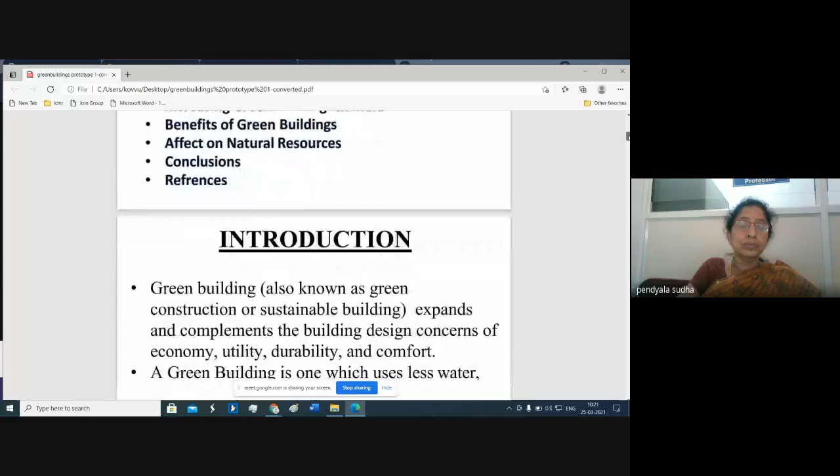So this is one of the examples of a green building. Now this green building expands and complements the building design concerns of economy, utility, durability, and comfort.

That means we use less water, we use less energy, we use solar. Less energy means energy efficiency - optimizing energy efficiency by using solar panels, so the building will be completely dependent on solar energy.

And it conserves natural resources - this is our third point. How does it conserve natural resources? Natural resources may include waste papers, slags, ash, and chopped wood. All these things we are using in construction, so this way it conserves all the natural resources occurring in the environment.

Then it generates less waste. Obviously if we are using natural resources, the waste we generate will be very less. And it provides healthier space for occupants as compared to conventional buildings - if we compare, pollution is very less, because here we are depending on natural resources only.

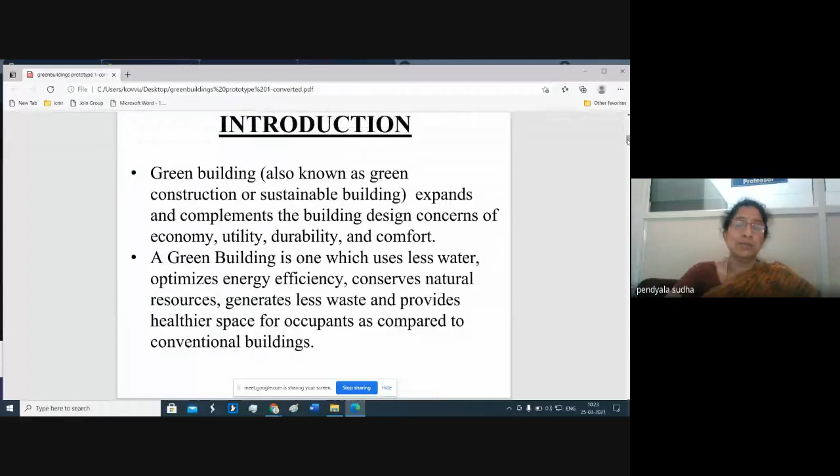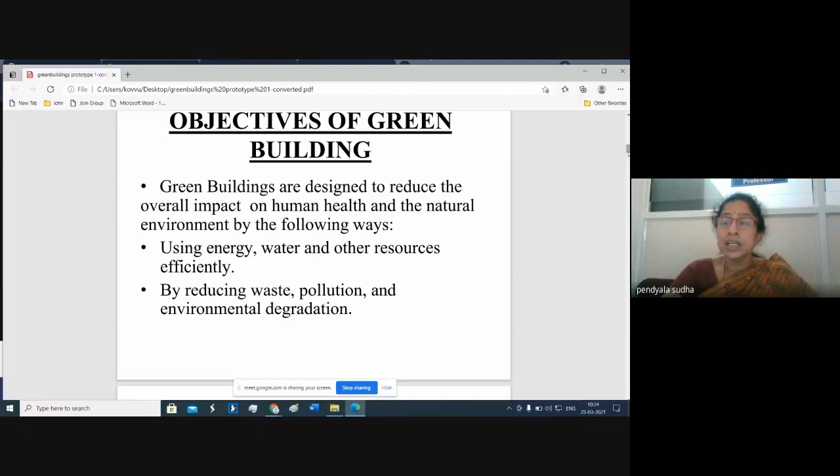Now, objectives. Green buildings are designed to reduce the impact on human health and the natural environment. We already discussed using energy, water and other resources efficiently, and by reducing waste, pollution and degradation - this is the new thing, environmental degradation. We are preventing environmental degradation.

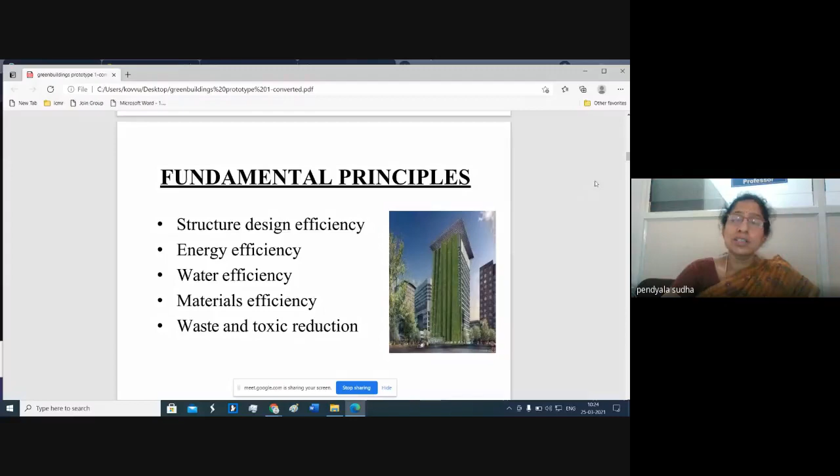So now, how is that efficiency achieved? You can just watch a building here - pillars are with walls, walls are with creepers. Now, it ensures 5 types of things: structural design efficiency, energy efficiency, water efficiency, material efficiency, and toxic reduction.

Now, what are the building materials used? We use slag from the steel mills and fly ash in concrete mixes. By using slag and fly ash, we are trying to reduce the carbon dioxide emissions, thereby reducing air pollution.

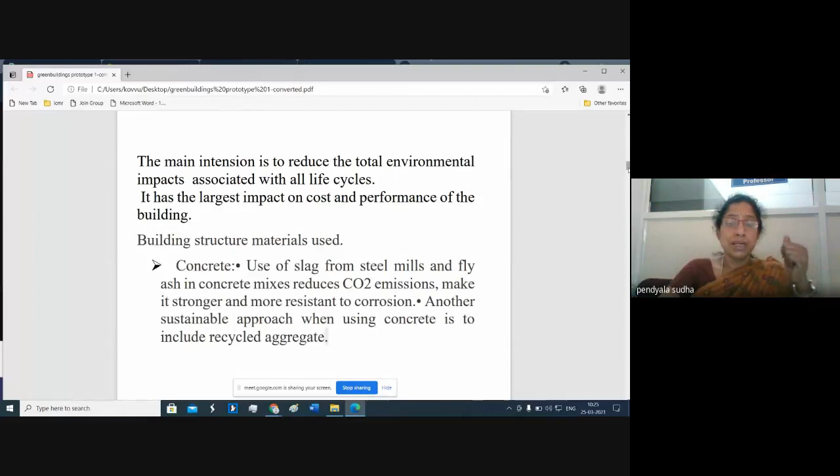And such type of building is also more strong and resistant to corrosion. Another advantage is that the sustainable approach when using concrete is to include recycled aggregate - the advantages when we use these two kinds of things are reduction of carbon dioxide emissions and more resistance to corrosion.

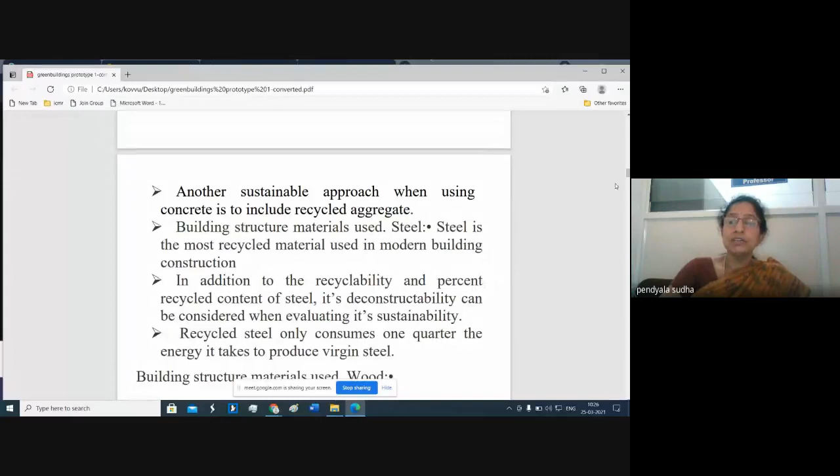Another sustainable approach while using concrete is to include recycled aggregate. Now, for building materials, we also use steel - in the modern world, the most recycled material used is steel. In addition to recyclability, the percentage of recycled content and deconstructability can be considered while evaluating its sustainability. Recycled steel consumes only 1/4 of the energy it takes to produce virgin steel.

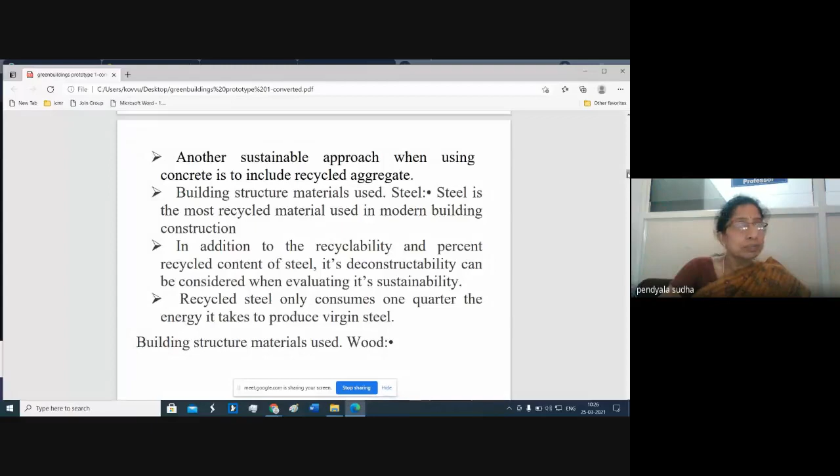Again, we are using wood. The sustainable areas of wood are efficient framing, alternative products, and sustainable material suppliers - these are the primary sustainable areas in the use of wood.

Even if you see, generally people go to gardens, people go here and there for such kind of environment - they require plants, they require trees. So for such an environment, we need not separately go to a garden, because that kind of bioclimate architecture we can have in the house itself. What we are doing is sending creepers to the walls - a creeper is a plant which creeps.

Or else, on the terrace, we can arrange a small garden - nowadays they are doing that. Even in restaurants, wherever you go, in restaurants and hotels in Hyderabad, you can see that on the terrace, a garden has been arranged.

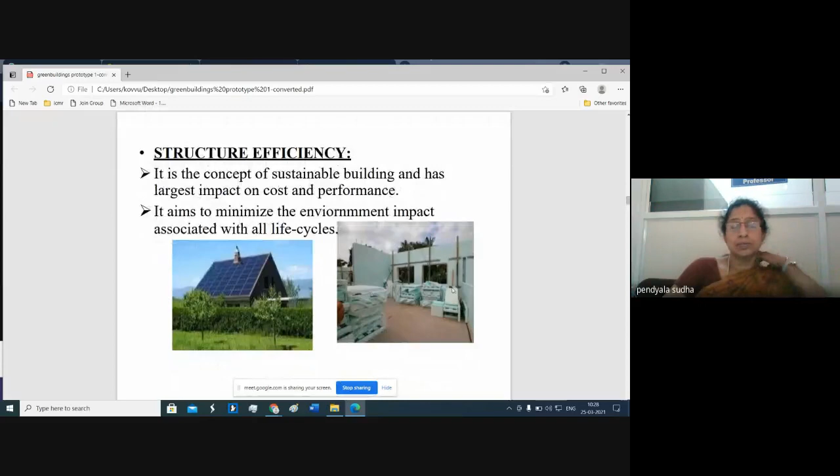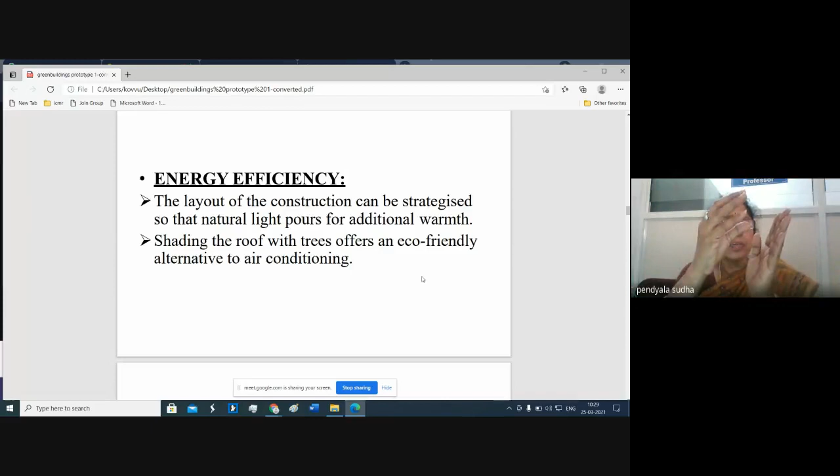Now, the layout of the construction can be strategized so that natural light pours in for additional warmth. In winter, when we want warmth, the strategy can also ensure additional light pours in. That means you can arrange a small pore-like structure through which sunlight directly pours and falls inside the house.

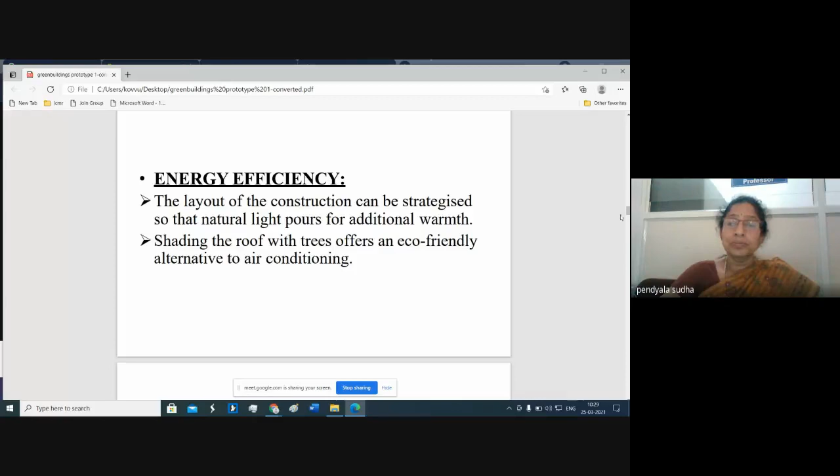Shading the roof with trees offers an eco-friendly alternative to air conditioning. As I told you, we can shade the roof with trees or a roof terrace garden. Upon the terrace and rooms, we can arrange trees, flower pots, and gardens.

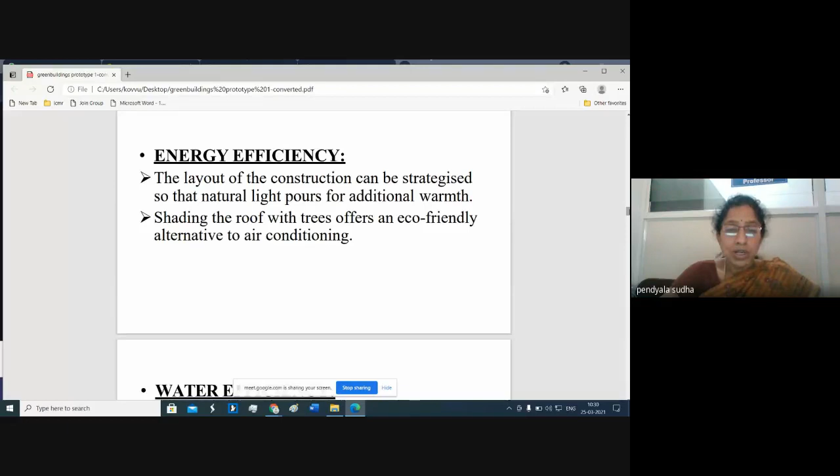Now, water efficiency - the second point. Here we are minimizing water consumption. How? Our aim is reuse and recycling of wastewater. So in every house, we set up a small wastewater recycling plant.

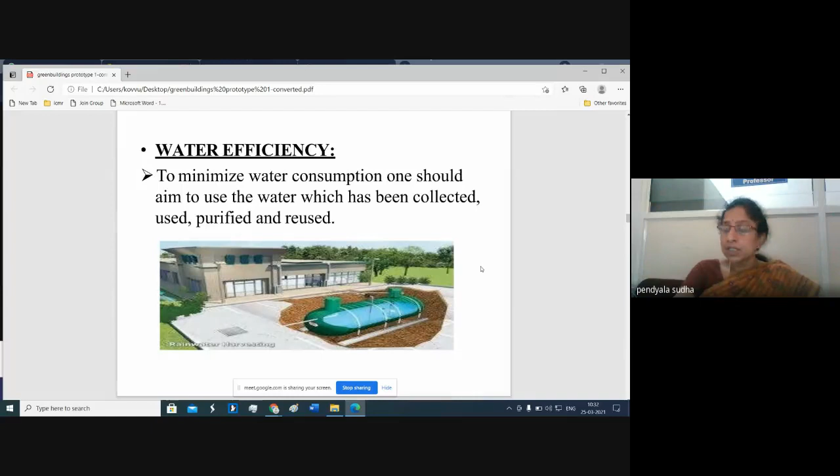Suppose at the backyard of the house, in a small place, a treatment plant is constructed - no need for primary, secondary, tertiary treatment units. Simply do filtration, construct water retaining pits or simple pits for removing sand, gravel, etc.

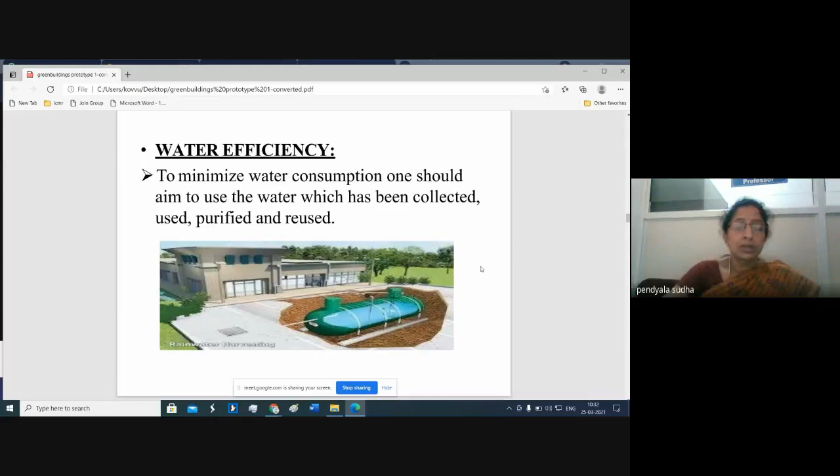Excuse me, just a minute, please.

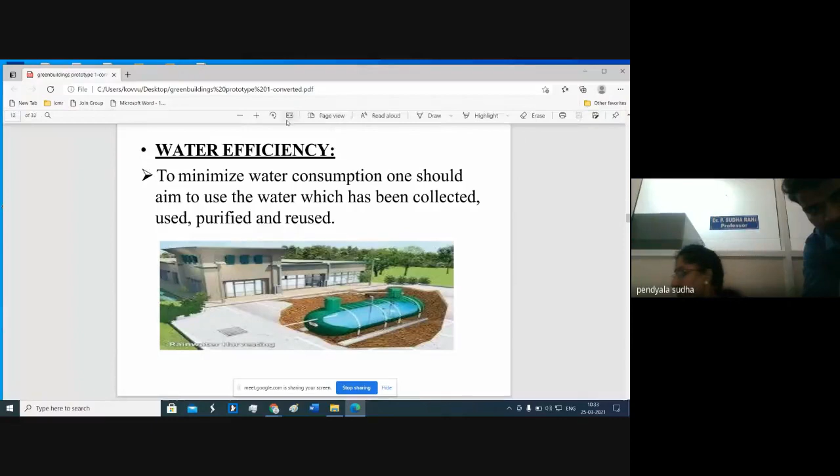Ma'am, should we leave now? Our next class is there, ma'am.

Madam, unmute your mic. Madam, your voice is not audible. Unmute your mic, madam.

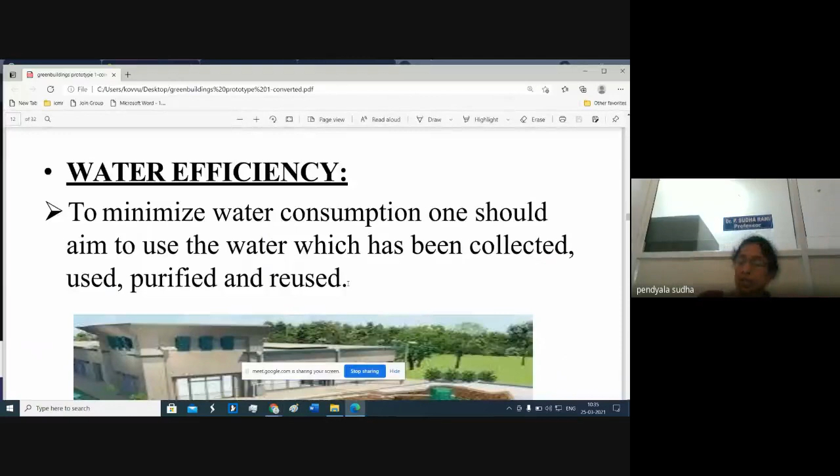Okay, fine. Let's continue. Now, what I was telling - are you able to see this, view the screen? Yes, ma'am. One by one, I will go through this.

So, water efficiency, we were speaking about. Lot of research is being done in this field. What I am trying to tell is that in the backyard, a small treatment plant is constructed which can remove oil and grease, which can remove suspended solids mostly, as well as color and odor.

These are the main things which interfere with water being reused. So if the water doesn't consist of suspended solids and total solids, etc., that water can be reused at least for gardening and other miscellaneous purposes.

So what we are trying to do is create a small treatment plant. In the treatment plant, we use screens and a scum remover, and we send oxygen so that the BOD, meaning the oxygen load, will be reduced. In this way we treat the wastewater.

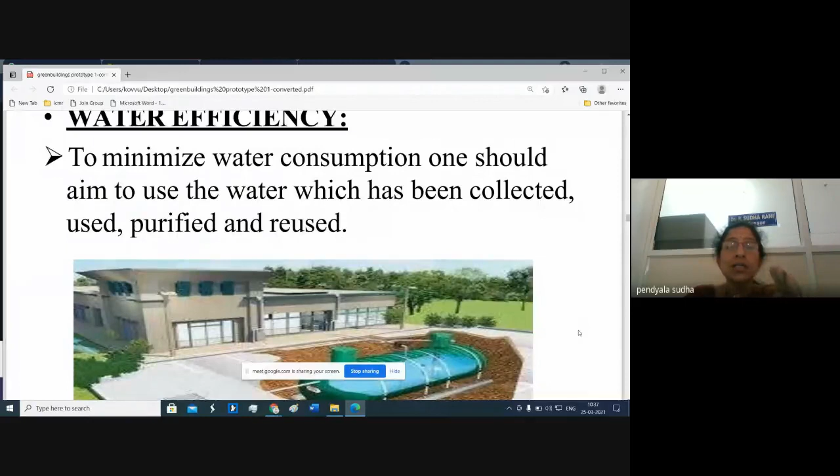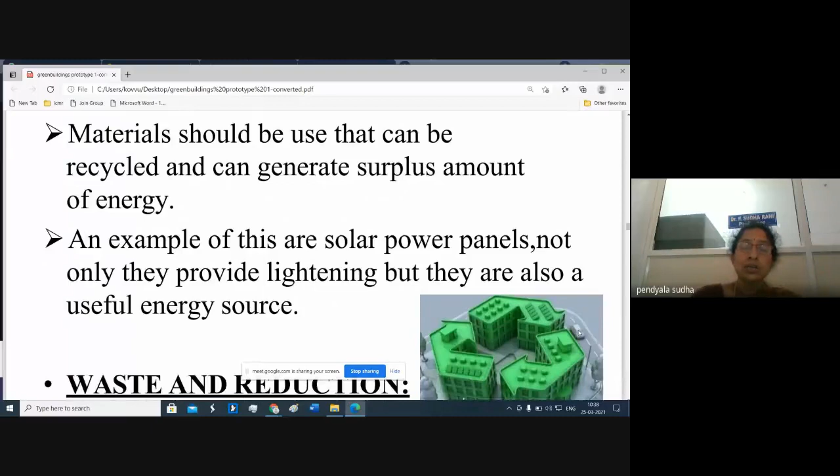Now the third thing is material efficiency. Nowadays in colleges and schools everywhere we are using solar energy, solar power. But in houses we have failed to do that. Most of the houses are not using solar energy.

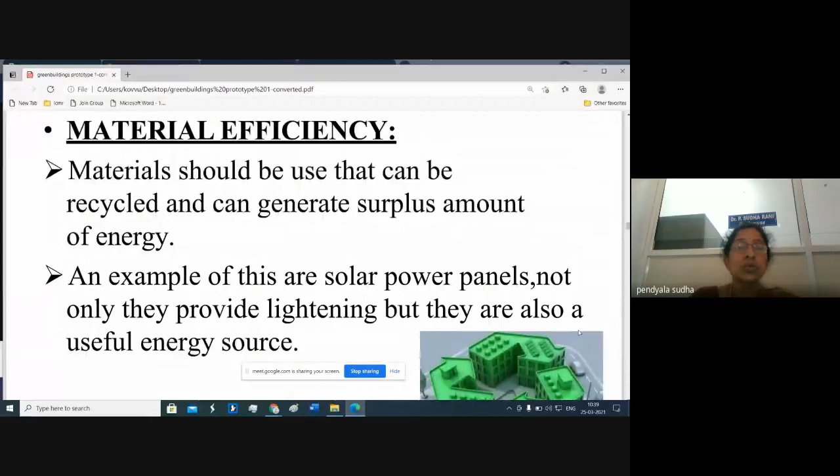Now you have to bring that concept also while constructing the house. Materials should be used such that they can be recycled. An example of this is solar power panels, which not only provide lighting but are also a source of energy. This needs to be brought into use for construction of houses and buildings, but they are not yet popular. Only 50% of houses use solar power panels, not 100%.

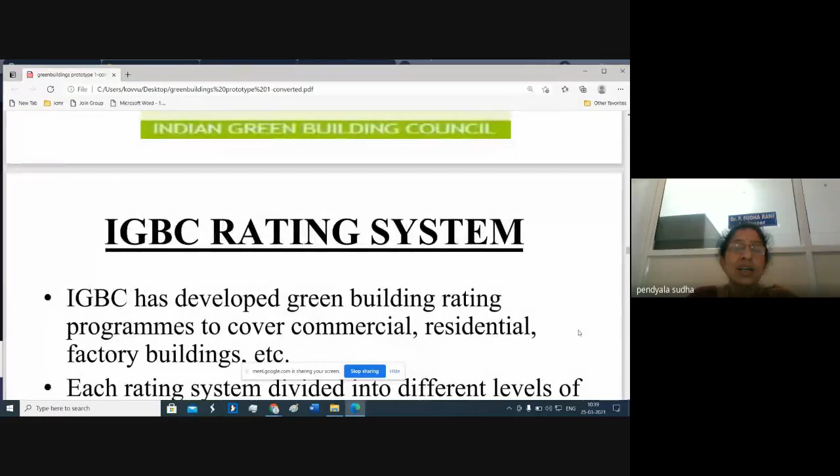The Indian Green Building Council, IGBC, was formed in 2001, and its aim was to bring the building movement in India and to become one of the global leaders by 2015 in green building. Still we are trying to do that. With this IGBC rating system, each rating is divided into 4 levels of certification: certified recognizes best practices, silver recognizes outstanding performance, gold means national excellence, and platinum means global leadership.

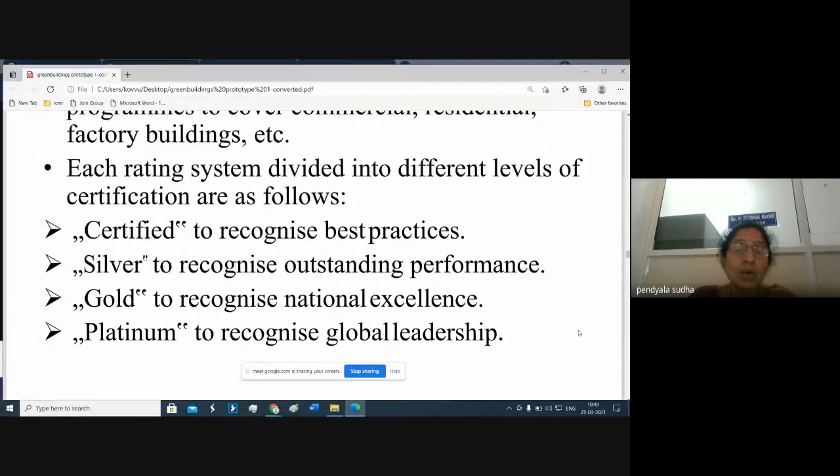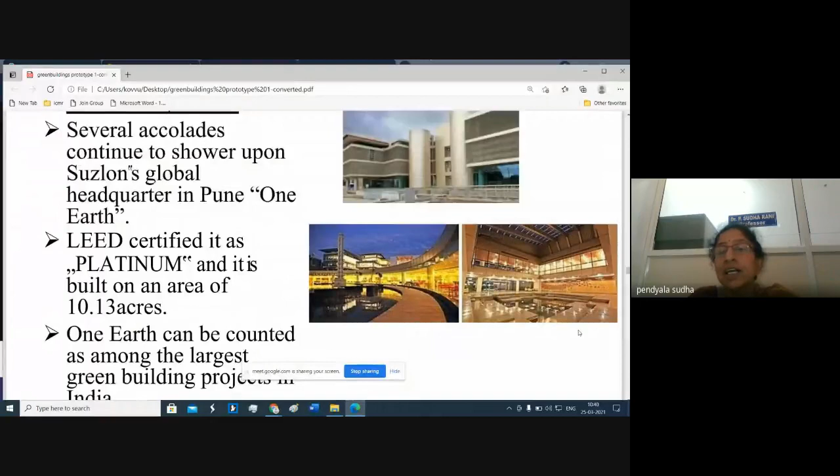This is platinum certified: Suzlon Energy Limited, Pune. LEED certified it as platinum, and it is built on an area of 10.13 acres. This building, One Earth, can be counted as among the largest green building projects in India.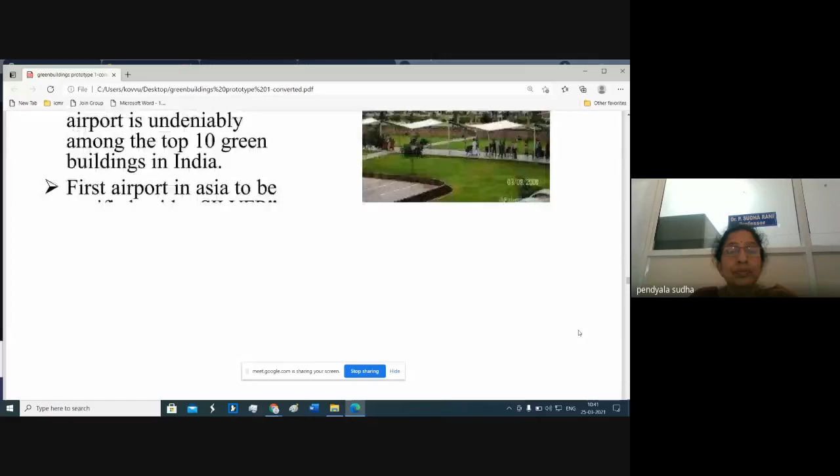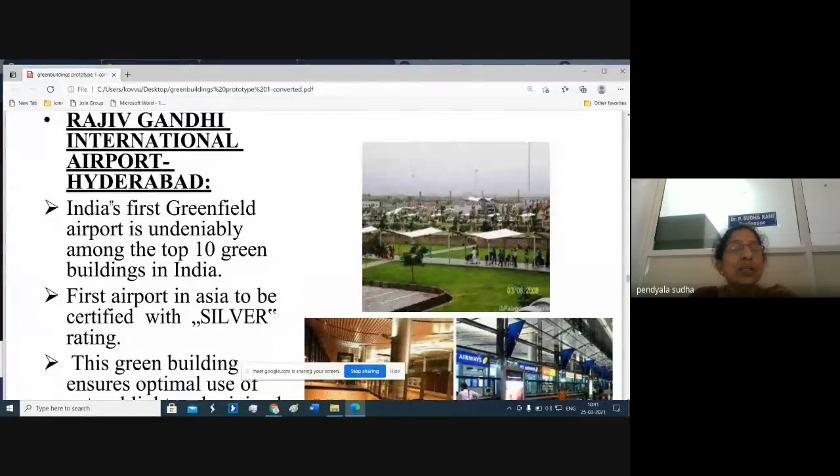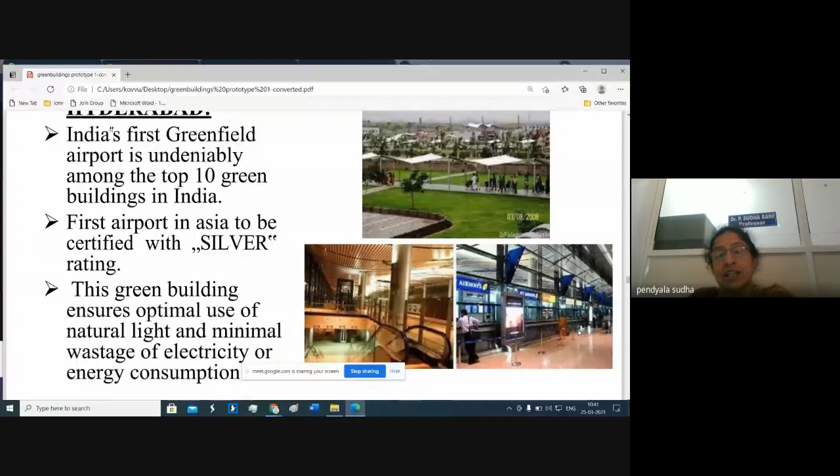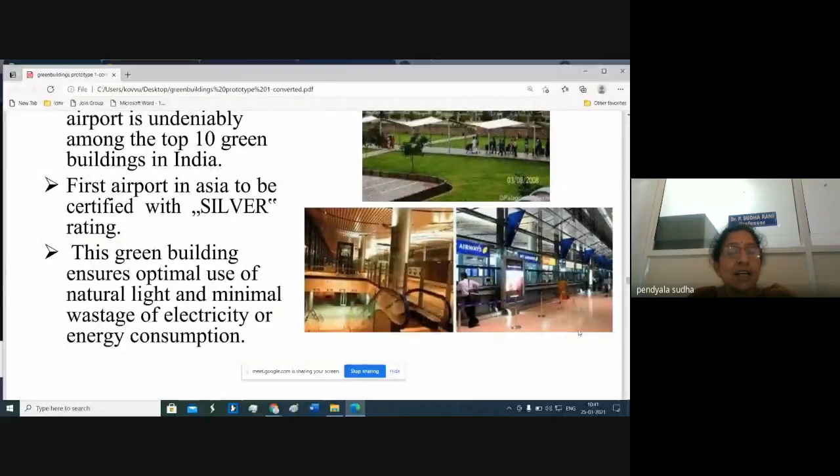Rajiv Gandhi International Airport, Hyderabad, India's first greenfield airport, is undeniably among the top 10 green buildings in India. It is the first airport in Asia to be certified with a silver rating. The green building ensures optimal use of natural light and minimal wastage of electricity and energy consumption.

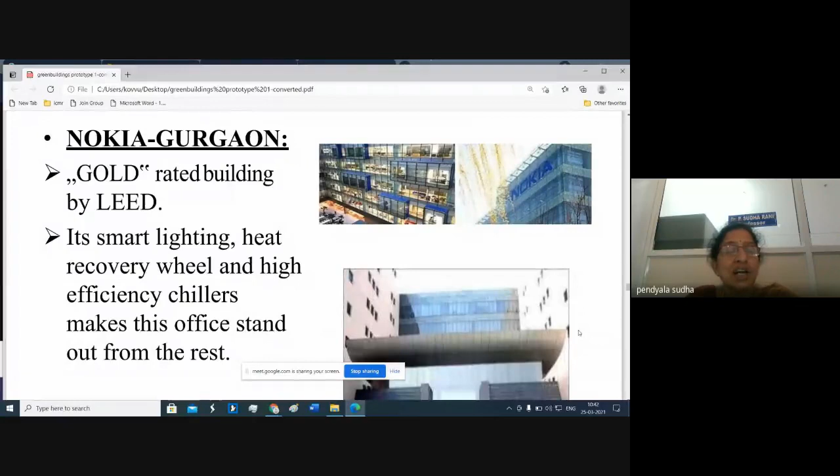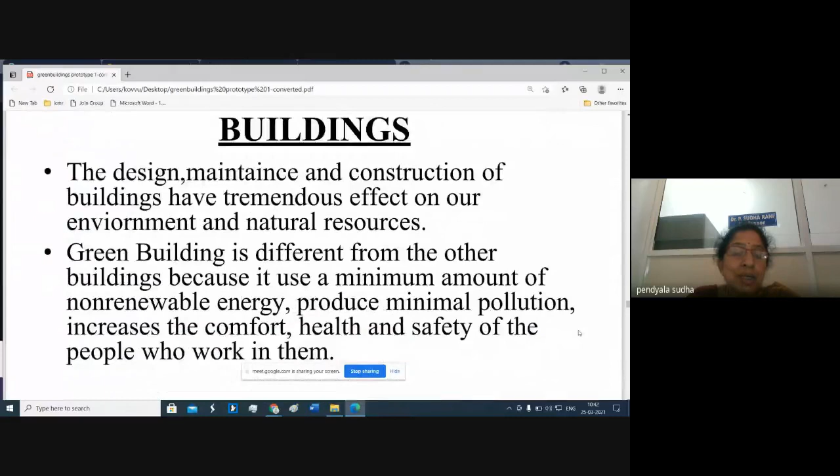Nokia Gurgaon is gold rated by LEED. It has smart lighting, a heat recovery wheel, and high efficiency chillers that make the office stand out from the rest. So these are some of the green buildings, completely different from other buildings. Today more than 1053 green buildings are being constructed all over India, of which 147 are certified and fully functional.

This is the status of green building in India. Now let us throw light on what materials are used. Let me show you.

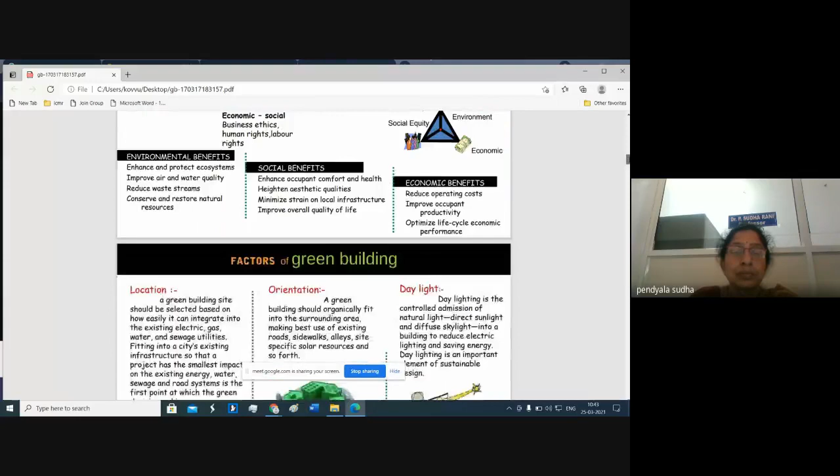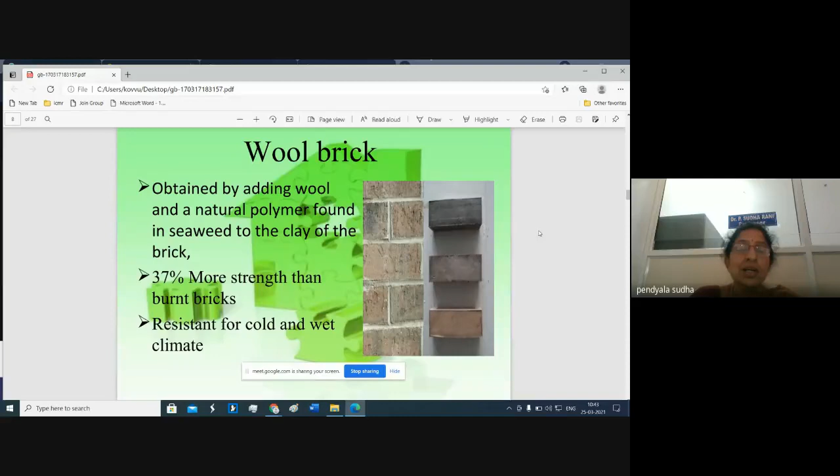Materials used: wool brick. These are some of the materials. Wool brick is obtained from wool added to the clay of the brick. The wool brick generally ensures 37% more strength than normal burnt bricks, and it is also resistant to cold and wet climate.

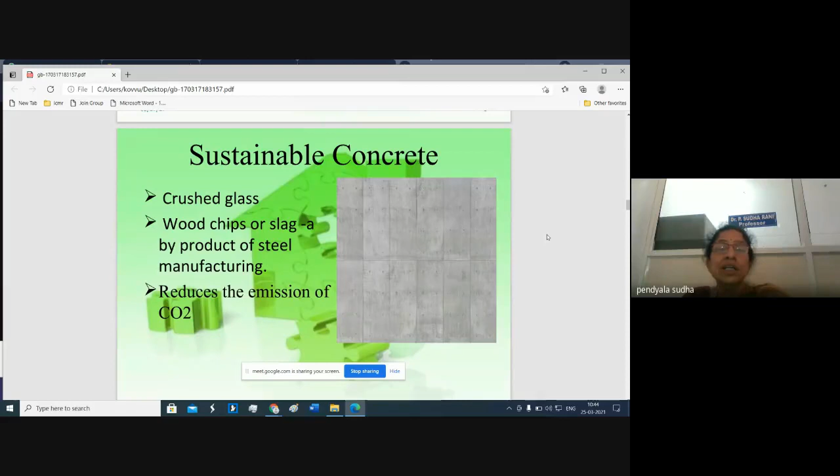Then again, sustainable concrete. What do you mean by sustainable concrete? We are using crushed glass, wood chips, or slag, a by-product of steel manufacturing, which reduces the emission of carbon dioxide. This kind of concrete is known as sustainable concrete.

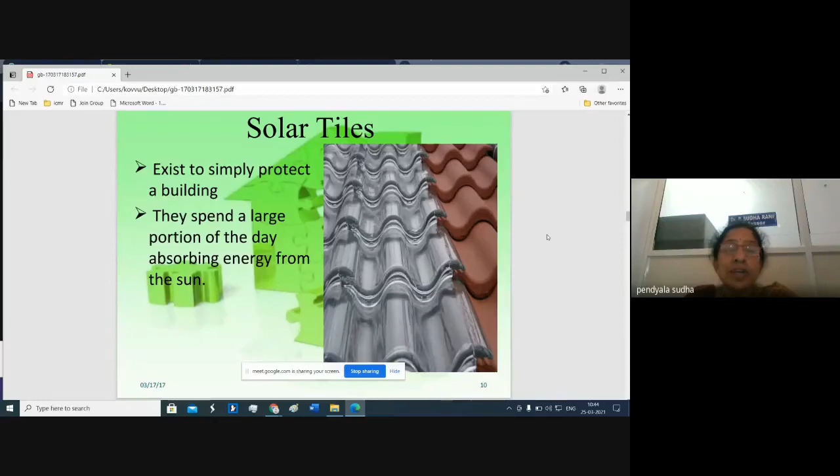Here we are using bricks, sustainable concrete, and solar tiles, which spend a large portion of the day absorbing energy from the sun. This is the difference between solar and normal tiles. So we have a solution for each and every portion of our construction, for example, bricks made out of wool.

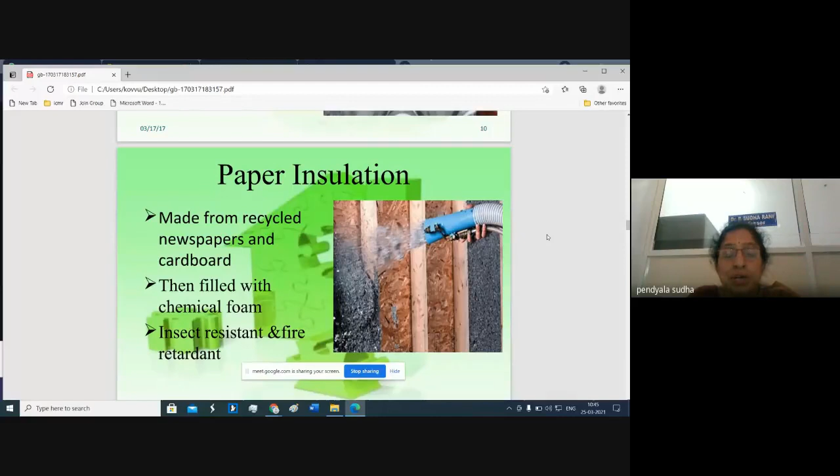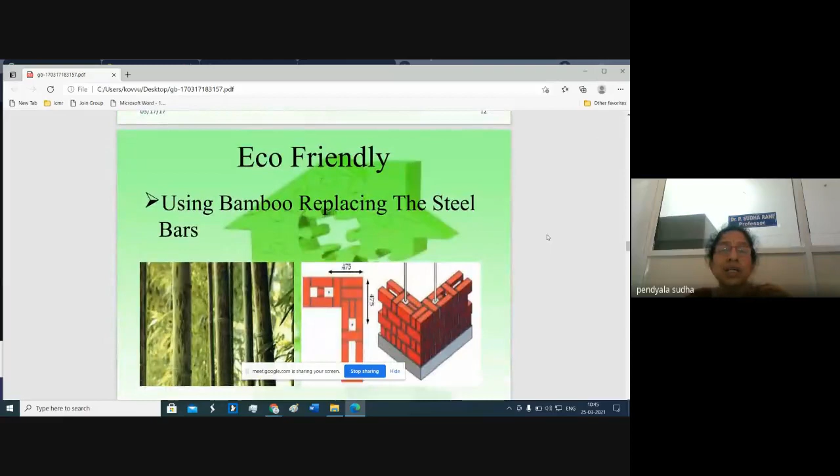Energy efficient tiles and paper insulation made from recycled newspapers and cardboard, filled with chemical foam, are insect resistant and fire retardant. Now you can also see triple glazed, super efficient windows, using many waste materials. And here, using bamboo replacing the steel bars, instead of steel bars we are using bamboo.

Now let us see the demerits. Initial cost is high, and it also requires space. Availability of materials is an issue - we have to search for the right materials initially. For example, the wood we want should not be normal wood, it should be efficient wood. We just can't go and buy simple normal wood and construct with it, or the building won't be stable.

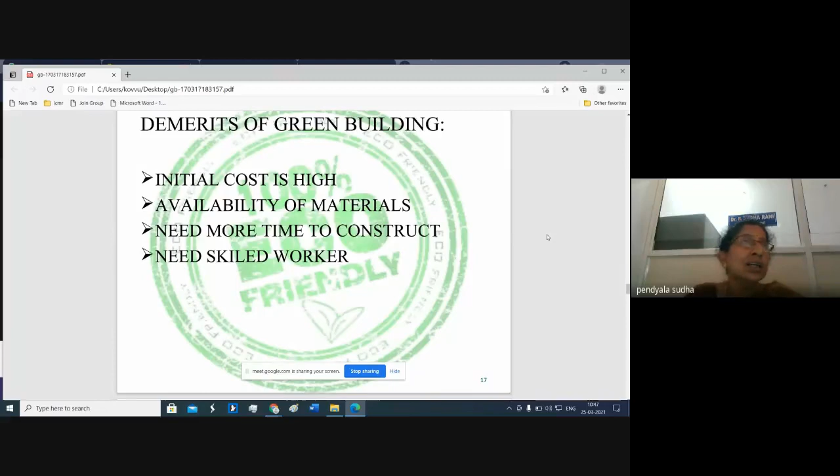So for that, the worker should also be skilled and have knowledge. The person going for construction of an eco-friendly building should have that knowledge. So these are some of the demerits while considering the green building, and otherwise everything is okay. Now this is about the green building.

So this was about green building and sustainability, and I hope everyone liked it. In future, students watching this would work on it more and try to implement this, and become great entrepreneurs. Start with a little, and then go for the high - don't think of high in the beginning itself. Come up with new ideas. This is all about green building, I hope you liked it, and you all will try to implement it. Thank you.